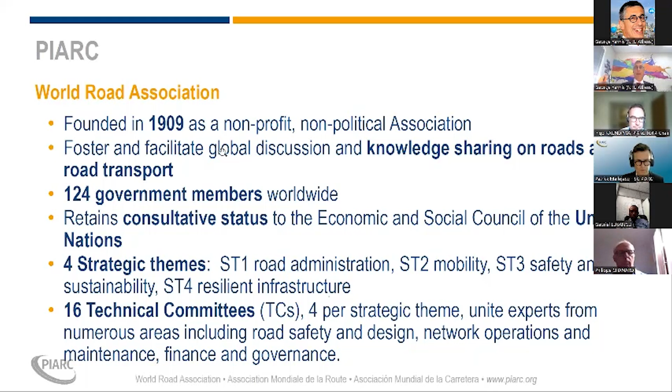In fact, we know everybody, PIARC is very active in all areas of road development and operation, but most importantly, has a very strong component on road safety.

The Technical Committee 3.1 on road safety, it is a part of ST3 and has a special focus on several issues on road safety.

And that was the basis to start this initiative on putting in value in promoting this great work.

Technical reports, the road safety manual, and several seminars are within the activities of PIARC road safety.

And lately this year, there is this project on promoting road safety and all the knowledge gathered within PIARC technical work and technical committees, with special focus on low and middle income countries. However, the lessons are also quite important for all countries in the world.

There is a special support by National Technical University of Athens and Austrian Institute of Technology to this initiative.

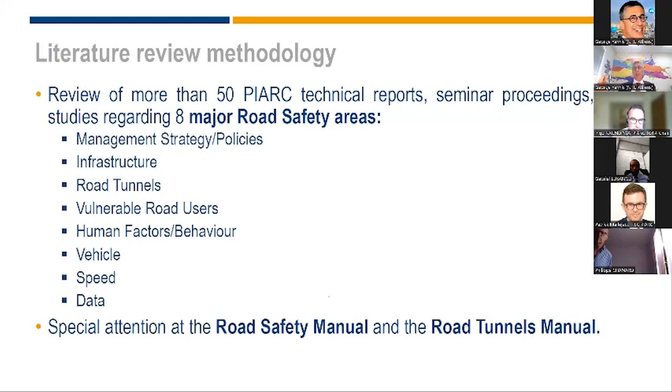We have this 1 year campaign. You have already witnessed some posts and communication campaigns at the newsletter, the frequent newsletters of PIARC.

And today we're going to talk about 4 key areas: road safety infrastructure, road safety tunnels, managing speed, and road safety data, where we highlight all the work of the Road Safety Technical Committee in a comprehensive way and useful for everybody.

So then welcome to my presentation about road tunnel safety. I will start with a brief overview about the safety principles for road tunnels. I will talk a bit about the specific hazards we have in road tunnels. They are a bit different and a bit more serious than what we have on the open road.

A very important topic for tunnels is human factors. And I will also touch some road tunnel safety measures which could be implemented by everyone. Finally, I will give some recommendations and some advice for useful PIARC reports in this area. So let's start with road tunnel safety principles.

For road tunnels, there are special infrastructures. We have high requirements for safety and availability. The consequences of events in a tunnel—if something happens, like a worst case event would be a fire—you have a very significant higher impact with this event than you have on the open road.

Tunnel safety is characterized by complex interaction of different aspects. You can see it here in the graph. Tunnel safety has an interaction with the tunnel user, so people driving through the tunnel must know how to behave correctly. Tunnel operation is also very important—this means the operator, maybe from a control room, and all operational procedures defined before opening a tunnel, which has a big impact on safety. Other big impact comes from the infrastructure: its design, structural design, and also the technical components installed for road tunnel safety.

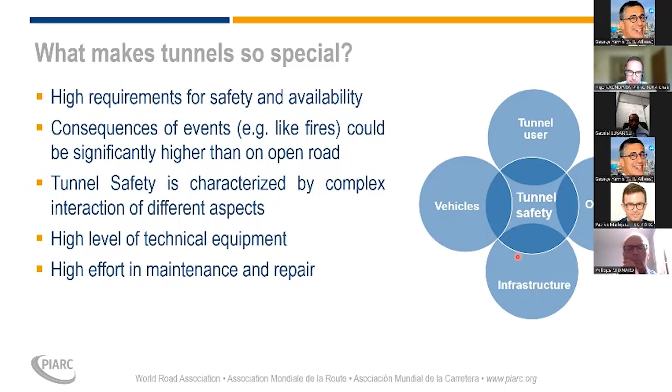So we have developed in PIARC a long time ago a so-called integrated approach to road tunnel safety. This integrated approach starts from the planning of your tunnel system and then goes to defining the safety features which are needed for the tunnel.

So, regarding the infrastructure and regarding operation, these features go into a safety analysis. This safety analysis could be, for example, done by a risk assessment. And if this safety analysis comes to the evaluation part, you have to check if your safety level is acceptable or not.

And if it's acceptable or not is checked against the minimum safety requirements from your legislation. You have so-called safety level criteria and also socio-economic and cost-benefit criteria, which are important here. Then you have the evaluation—you can say the tunnel is afterwards safe and cost effective to operate. Then you can open your tunnel.

The next step would be, are there any changes? You also have to question yourself, if you have an in-service tunnel, are there any changes? Have you done an upgrading, or are there new regulations for your tunnel? Is there a change in the usage of the tunnel, or are there some experiences learned from operation? If yes, the process will start again and you go through this loop. If not, the process comes to an end and you can still operate your tunnel as usual.

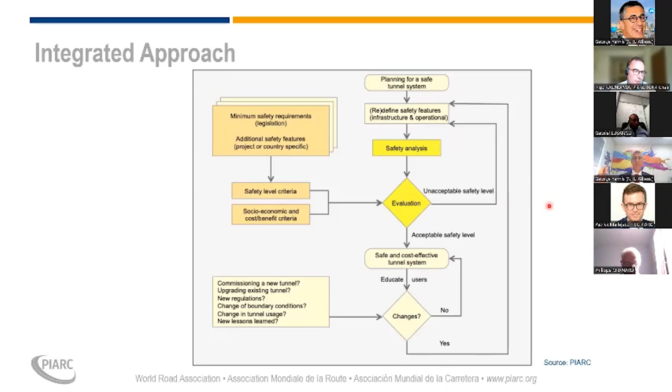So this is the integrated approach, which is very important, and we have a very interesting and detailed PIARC report on that. Safety level criteria I already mentioned. Structure, infrastructure and operational safety measures I will come to later. The socioeconomic and cost-benefit criteria I mentioned before is also a very important aspect of tunnel safety.

The safety assessment techniques, we will go to in the later part of the presentation. The risk assessment procedures we have as a tool for our road tunnels. And the stage of the tunnel life is also important—are we talking about the planning stage, design stage, construction or commissioning stage, or am I in the process of upgrading and refurbishing a tunnel?

A very important aspect is also the operating experience of the staff and the tunnel system condition. Of course, you have to maintain all your technical equipment, but also the structure, so that everything is in good condition. This is also important for tunnel safety.

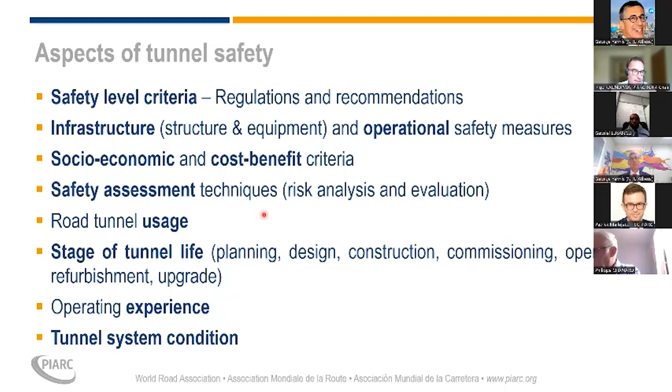So what could be specific hazards in road tunnels? Specific hazards are incidents which require special attention. If you are in a tunnel, you are in a confined space, not on the open road. So if something happens, it's not easy for people to evacuate. The air in the tunnel, the light conditions, everything must be controlled from a technical point of view. It's not like on the open road.

Therefore, we have some hazards which are important to consider in road tunnel design and management: these are collisions, fires, and release of dangerous goods. I will go into detail regarding collisions and fires in the next slides. Collisions are events happening quite frequently in road tunnels. There are some positive factors reducing the probability of a collision in tunnels—a tunnel could be a positive environment preventing collisions. You have very good controlled conditions in the tunnel, so if outside you have heavy rain or heavy snowfall, inside the tunnel everything is dry.

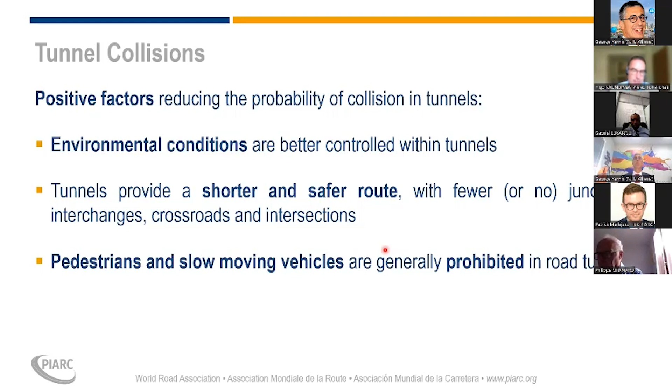You have light conditions, good ventilation if the tunnel is designed well, so good conditions, so less probability of accidents. And you have a short and safe route with few junctions or no junctions, no intersections, so it's a very quiet, very linear way of driving through a tunnel. And you have no pedestrians and slow-moving vehicles normally in a motorway tunnel. So these are the positive effects regarding collisions.

Negative factors increasing the probability of collisions in tunnels could be obstacles, for example the tunnel portal. This is a part of the tunnel which is prone to accidents. You have the tunnel wall, where you can collide with your vehicle if you're getting out of the lane, and this may also influence the driving behavior.

Mostly we have a very narrow or very small road width in the tunnel. So due to the high cost of a tunnel structure, you often have no emergency lane like you have on the open road. You have this change in light conditions, so you have to have a very good lighting system to avoid the black hole effect. Monotonous atmosphere is only relevant for very long tunnels, let's say longer than 1 or 2 kilometers.

Tunnel conditions may cause a misjudgment of horizontal and vertical alignment, so sometimes it's not so easy to see where the road is going, what is the gradient in the tunnel. But we normally have a lot of installations now in the tunnels, a lot of light, so it's getting better, I think, to see the road alignment.

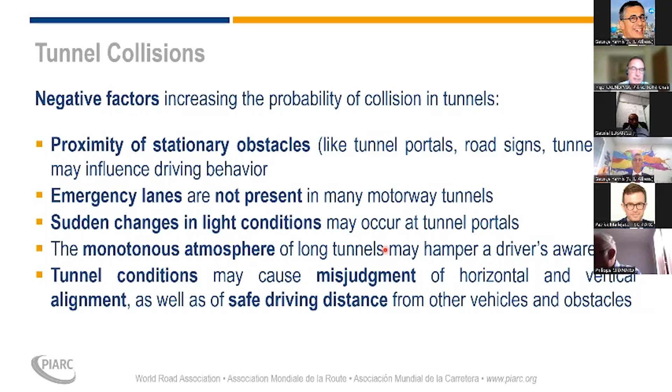And you have to be very quick to safely evacuate in case of a tunnel fire. These are fire curves, of course, for a worst case scenario. I will come to the different fire types later.

So the factors influencing a tunnel fire will be the fire load - is it a heavy goods vehicle, maybe loaded with wood? Technical conditions of the vehicles. Airflow is very important, so the ventilation conditions in the tunnel are very important for the influence of a tunnel fire. And of course the design of the tunnel regarding fire - is all the structural material fireproof, is the right operational equipment in the tunnel to deal with the fire.

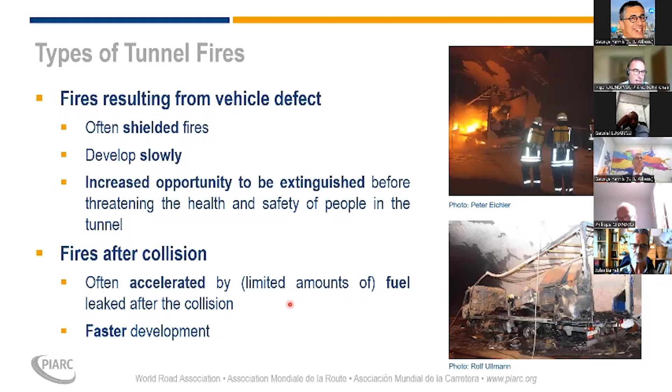I will now come to the human factors. This is a very special and very important part for road tunnels to consider. Design of tunnels and the operation should take into account human factors - this is very, very important. Some people have a feeling of anxiety if they drive through a road tunnel because of the confined space, it's maybe a bit dark, and therefore it's very important to inform users.

So users must be informed how to behave correctly in a road tunnel. This is very important to have the user understand all the operational and safety equipment which is in a tunnel. This is very important to have safety campaigns in your country.

There are also some measures which should be taken. So tunnel safety facilities must be good, recognizable. So you need good lighting that everyone driving through a tunnel at 80 kilometers per hour or faster will see where the safety facilities are. Alarm signals should be provided by multiple-redundant sources, so maybe you have a public address system in your tunnel and you have variable message signs or other equipment.

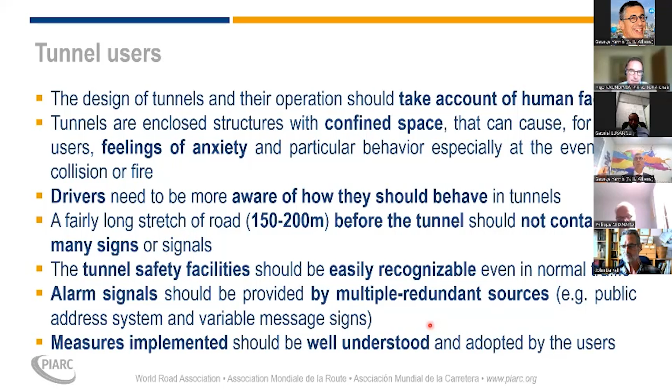It's very important to have different ways of approaching a user in the tunnel to communicate with them. If he has to evacuate, it must be very clear to him. So it's very important to have good communication with the user. Human factors are also important for the operators.

The operating staff is responsible for monitoring and controlling the tunnels. They are normally controlling a lot of tunnels. We have centralized operating centers working 24/7, with one operator supervising 20, 30 or more tunnels.

It's important that they know all the procedures, that they are very well trained, that they know how to inform and warn users in real time, and that they have good coordination with all the other rescue teams or first responders, which are needed if something happens in the tunnel.

This issue becomes very tricky if you have a cross-border tunnel. Then you have to also think about joint trainings with the other country, and have special procedures so that it's clear who has the responsibility for what part of the tunnel.

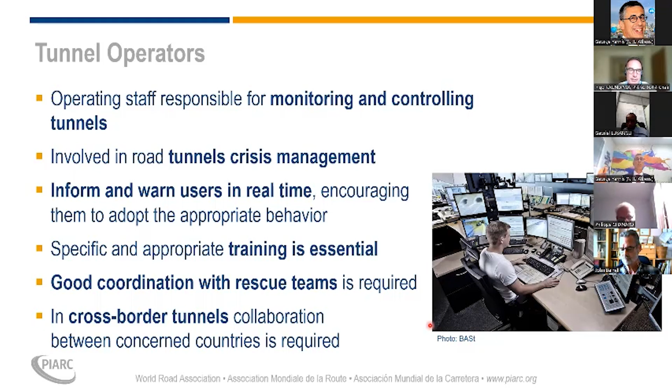Real-time communication - as I mentioned before, the communication with the user is very important. There are a lot of systems built into the tunnel for real-time communications. You also have mobile connections in many tunnels, the public address system I mentioned, and for people without a cell phone, we still have emergency call cabins which could be used.

We have these cabins every 100, 200, 300 meters, depending on the country, and there is a lot of real-time communication equipment already existing in the tunnels.

We have some new things like in-vehicle systems, which will become more important in the future. I think the communication from the tunnel to the car could be done with the new technologies we have in the very newest cars. So there are a lot of possibilities to communicate with users, which should be used to increase tunnel safety.

Tunnel operators and emergency services - human factors are important for them too. They have to consult and cooperate during the tunnel design process. They have to have very good operational measures in place, contingency plans, and to prepare for all possible hazards and events which could happen in a road tunnel.

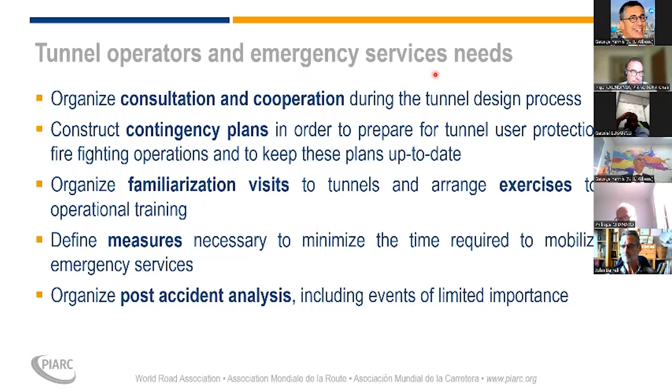So what could be tunnel safety measures? We have measures preventing the occurrence of significant incidents. An important measure is the lighting of the tunnels, to reduce the black hole effect, lane guidance aids, LED lights. The ventilation system I mentioned is very important in the case of a fire - we need a very good ventilation system to prevent a fire or to mitigate its effects.

As on the open road, you have overhead signal systems and a lot of variable message signs, and speed limits must be included in the tunnel, along with speed control. In some tunnels, you have speed cameras to ensure users are using the right speed in the tunnel.

This is very important, and preventive maintenance is important. So if something is happening in your tunnel, it's always good that you have a good maintenance plan, so that in the case of an accident or a fire, everything is working in your tunnel. You have to include good maintenance procedures.

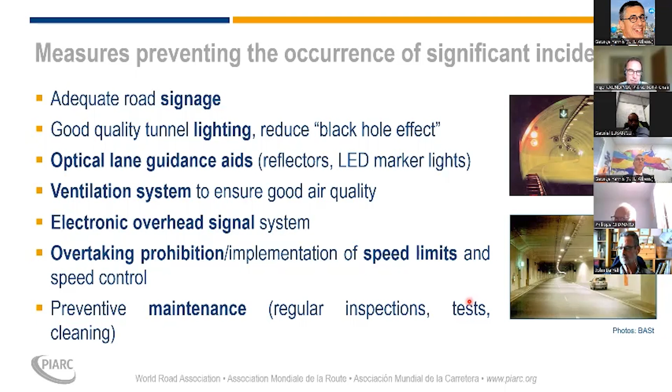Mitigation measures - if something happens in your tunnel, you can have different parts of mitigation measures. You can soften the mechanical impact of a collision, for example, by using safety barriers, very important at the portal of a tunnel.

Avoiding secondary collisions is also something very important. So if something happens in the tunnel, directly close one lane or the whole tunnel tube to avoid secondary collisions and to prevent it from becoming a big scenario which could be very, very dangerous.

Supervision by the control center, as I mentioned before, is very important. Ventilation to control the fire is a very important safety system which helps to mitigate the effect of a fire.

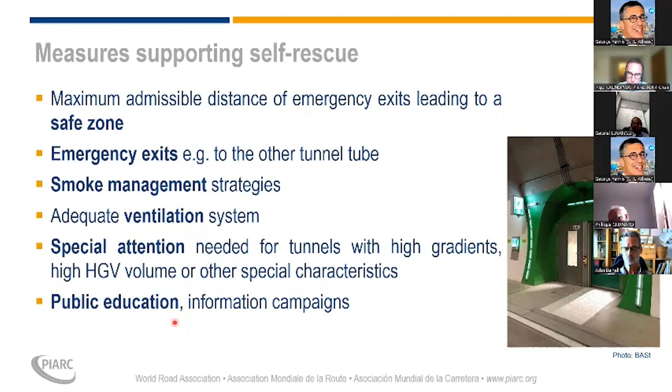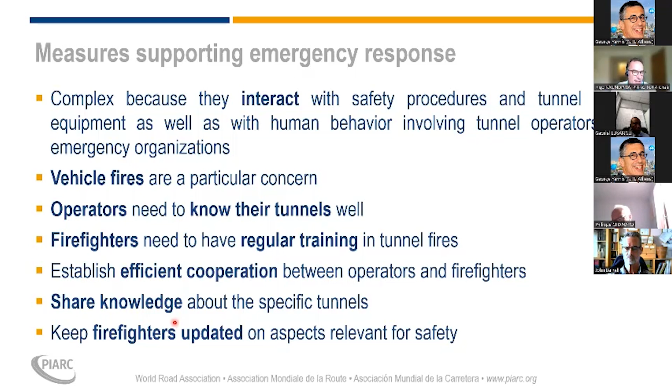Measures supporting emergency response are also important. I will not go into detail here because time is running quickly. The operators need to know their tunnels. This is important. Firefighters have to have regular training and good cooperation with the local tunnel operator.

So, your legal criteria in your country - if the risk is acceptable, this process will stop. If not, you have to implement safety measures and the process starts again. This is very briefly the basic process of risk assessment.

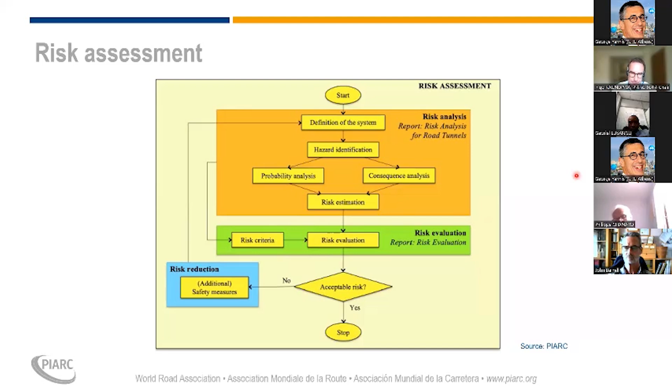We also have a procedure for upgrading or improving the safety of existing tunnels, also published in a PIARC report. This procedure is very similar to the risk assessment, showing how you can assess the safety level of your existing infrastructure. If the safety level is not acceptable, you start implementing additional tunnel safety measures, and then continue the process again, hopefully leading to a safe road tunnel.

So finally, recommendations. What could we learn from all these different aspects I mentioned in my presentation? The integrated approach has proved to be a very good approach.

This should be applied by you during the design of road tunnels, but also later in the operational phase. It's very important to take into account human factors, not only for the users, but also for operators, firefighters, and so on. A safety concept is very important at an early design stage, and it should be provided and adapted during the lifetime of the infrastructure.

Good cooperation between the operator and the firefighting organizations is also key. Measures for prevention, mitigation, self-rescue, and emergency response - I've shown you some examples in the presentation. These must be adapted for the tunnel.

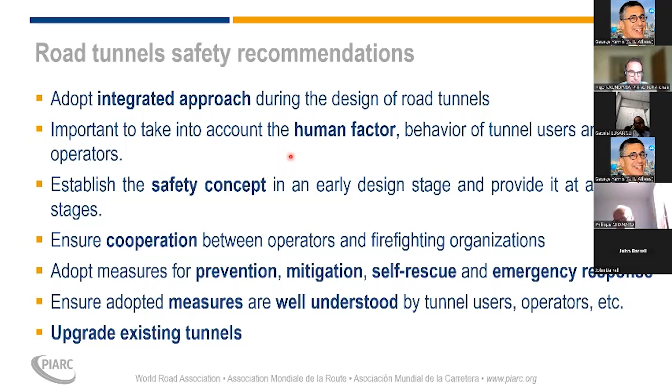These are some PIARC reports which are relevant, which I've copied into this last slide of my presentation. You can click here and you will have the reports directly in your web browser.

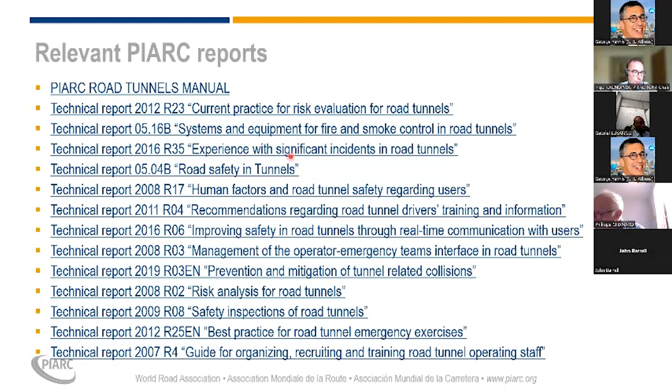Finally, I would like to remind you of the upcoming World Road Congress in Prague. We will have a technical session on road tunnel operation and safety on Thursday morning. In this session, we will have a presentation about the special challenges of road tunnel safety for low and middle income countries, presented by our colleagues from South Africa and India. I think this will be a very important and interesting session and presentation at the World Road Congress.

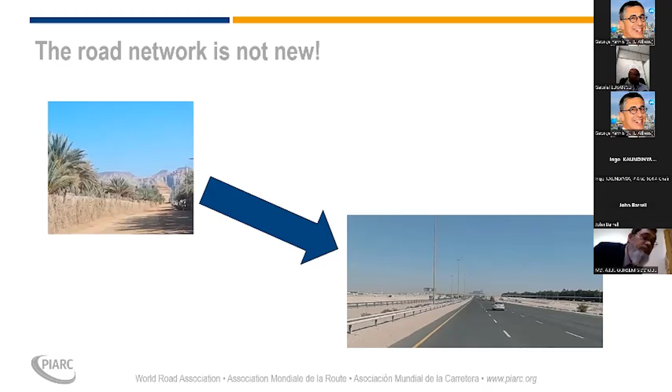We need to consider all road users, and when they're using what is a variable road network, they need clear indications of what to expect, when to anticipate changes, and how to take appropriate action. So they need consistency: consistency of signing, consistency of road layout, consistency of expectation on what to do, and sufficient visibility to recognize those changes, recognize those hazards, and be able to take appropriate action.

They also need to understand what those features are. They need to be legible. They need to read the road environment, to be aware of who is around, what their actions might be, and how they can react appropriately. It is all about the road user being able to react appropriately and in sufficient time to deal with the conditions ahead.

It needs to be done comprehensively, needs to be done consistently. But importantly, the road user needs to understand what is an appropriate speed for particular circumstances in order to negotiate the road network safely. If it is not credible, if they don't believe there should be a limited speed along a particular stretch of road, they won't do it. And the one time they really need it is when they come to make mistakes.

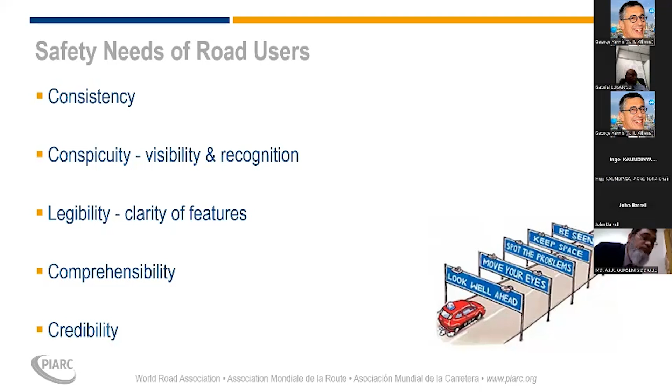Traditionally, we have dealt with incidents as they happen and looked to correct specific problems. More recently, we have recognized that it is not necessarily the individual that is at fault. It is a systematic failure of the network as a whole. So dealing with a safe system rather than individuals is vitally important.

And the safe system basically says human beings are fallible. We can make mistakes. So when we make mistakes, the system needs to be forgiving. We need to be able to make those errors and corrections without it having fatal consequences. So when there is a crash or a collision, the resultant forces need to be survivable. And the most vulnerable element in that system is the human being.

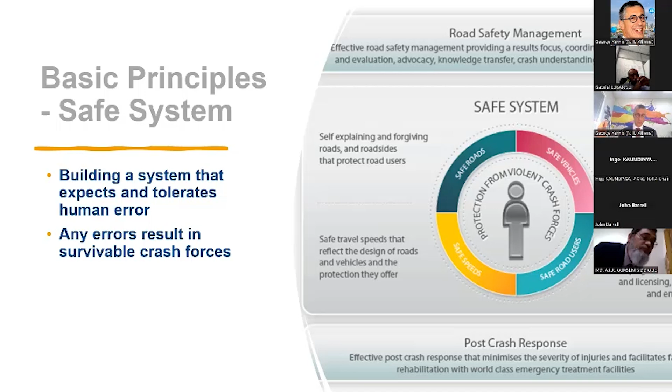Human beings cannot withstand severe stresses and severe changes safely. It needs to be done gradually. Those forces need to be reduced to a survivable level. And the classic chart is where pedestrians are involved: as soon as collision speeds exceed 30 kilometers an hour, there is a very rapid change in survivability.

So at speeds in excess of 40 or 50 kilometers an hour, unprotected pedestrians or cyclists are more likely to be killed. The vehicle itself provides a degree of impact protection, but that is only valid at certain speeds, and the areas of protection around vehicles varies. Side impact collisions are survivable around about 60 kilometers an hour. Head-on collisions, anything above 70 or 80 kilometers an hour, leads to fatal injuries.

So we need to shape and control our streets and roads so that they are safe for all road users, bearing those types of collisions in mind, taking those into account. And there's essentially six basic types of collision.

The main one, particularly on a link or in a rural area, is loss of control. On a dead straight road, in perfect conditions, you would anticipate that drivers don't have a problem. Increasingly they do, whether it is tiredness, monotony, or vehicle failure, and they will lose control in the lane and potentially collide with the vehicle coming the other way, or if there are pedestrians and cyclists by the side of the road, they can injure them. They will also collide with roadside hazards.

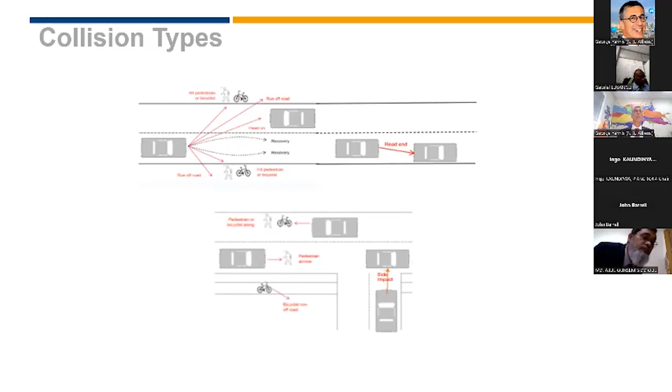Equally, if visibility is poor, there's a risk of rear end collisions, and drivers need to be able to adapt to those situations at an appropriate speed. And when you deal with intersections, clearly a side impact collision with a vehicle or with other road users crossing the side road is equally likely. You can also interact with slow moving vehicles, pedestrians and cyclists within the carriageway itself. Whatever is an appropriate speed needs to consider these different types of collisions and the likelihood with which they can occur.

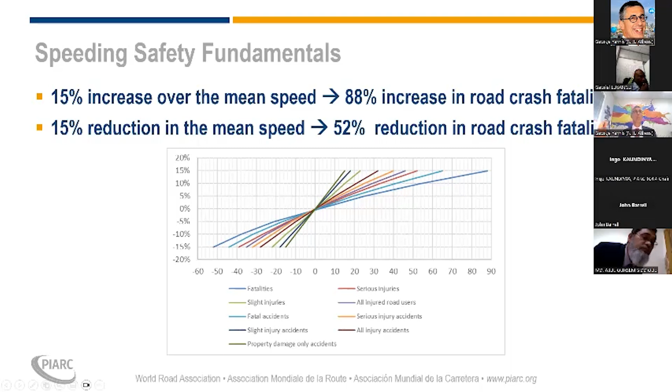Trouble is, speed and collision severity are not linear. A 15% increase in mean speed can lead to an 88% increase in road crash fatalities. Similarly, a reduction in speed can give a 50% reduction in crash fatalities, which is fine bearing in mind mean speed. But individual vehicles will travel at different speeds, and there will be variability around the mean speed or the 85th percentile speed at which drivers choose to travel, because that is where they individually feel safe.

Roads with low complexity—wide, straight, open roads with no intersections and very few vulnerable or slow moving vehicles—are designed for drivers to reach higher speeds. The risk of crash occurrence is mainly related to the difference between the speed designed as safe and the speed actually held by drivers, thinking this is what I feel comfortable with, this is what I can deal safely with.

The overall aim with the road network is to create a road where the varying speed parameters are all in balance. When we design a new road, we tend to deal with design speed—the speed at which we want drivers of vehicles to travel.

The wider and straighter the road, the more lanes it has, the greater the forward visibility, restrictions on intersections, and low presence of pedestrians, cyclists, non-motorized users, then we go for very high design speeds, typically 120, 140 kilometers an hour. That would like to be within the safe speed limit, assuming head-on collisions have been removed and the posted speed limit is in place to guide drivers at what is an appropriate and safe speed.

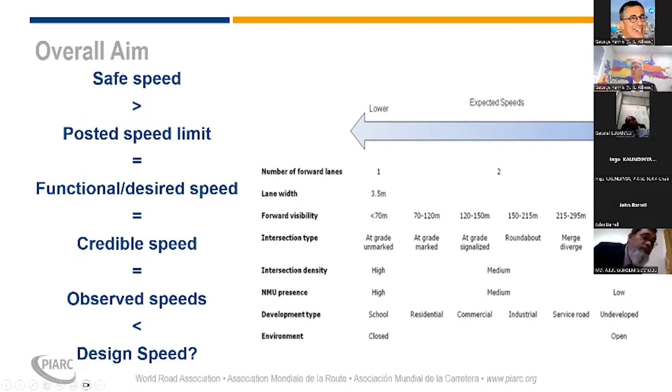Because we need to limit the standard set of speed limits that are consistently applied. We can apply any number of speed limits we choose, but the more speed limits you apply, the more frequently you change them, the more likely people are to not recognize the need for them.

There needs to be an overall body or lawmaking process that sets speed limits according to safe, survivable standards—posted speed limits that are in line with the function of the road. They're safe, self-explaining and intuitive, and importantly, clearly and consistently signed. The signing of speed limits is crucial to determining appropriate road user behaviour.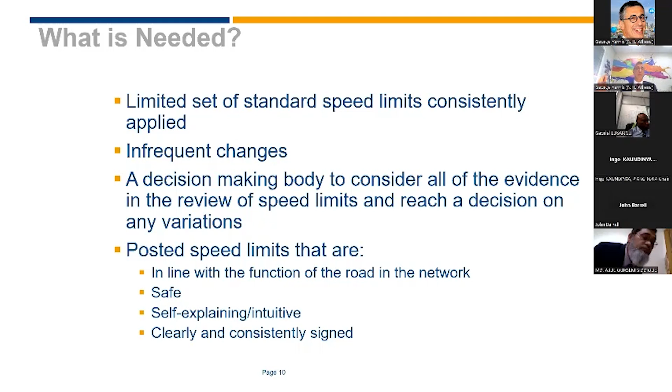So what is the safe speed? Essentially, safe speeds vary depending on conditions. If it's wet, if it's dark, if it's raining, then the safe speed will vary.

For general road conditions where pedestrians are prevalent and there is the possibility of a mix between pedestrians and vehicles—where you don't have well segregated footways and you're asking pedestrians to use part of the travel lanes or carriageway to get around—then you're looking at safe speeds of around 30 kilometers an hour.

This is typically around schools and in some intense urban areas where you have a large number of intersections where side impacts are possible—uncontrolled or priority crossroads and T-junctions, potentially roundabouts. Signalised intersections tend to remove side impact collisions because you're negotiating the same space at different periods of time.

But all those uncontrolled or semi-regulated intersections need to be controlled within a safe speed of 50 kilometers an hour. Single carriageways outside of those situations can operate safely up to 70 kilometers an hour.

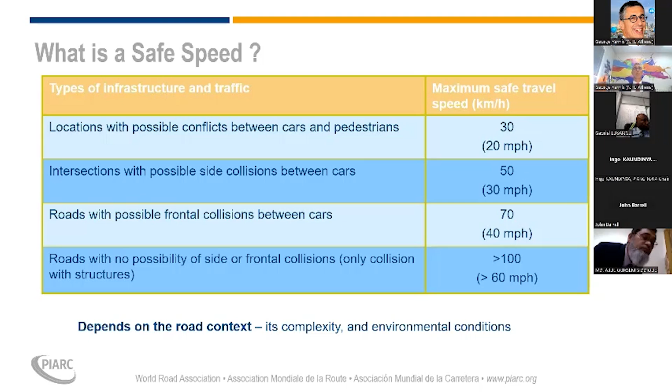In many low middle income countries, herded animals along large rural corridors present a major and uncontrolled hazard where vehicle speeds need to be reduced where they're in large numbers.

Importantly, when considering the road, you need to look at its context. We tend to think of roads as just fulfilling a movement function, getting from A to B as readily and safely as possible. But inevitably, roads pass through a number of different landscapes, whether it's urban, semi-urban, or rural.

And the function of the road, from a purely movement one to an access and sense of place where a lot of other activities take place, is very fluid. There is no clear distinction between the mobility and land use activities of particularly arterials, collectors, and locals.

Local roads may front directly onto arterials, and the control of that road hierarchy and how we manage speed between them has a fundamental impact on the credibility of safe speeds and the adaptability of the road network to those speeds. So to get safe speed compliance, we need an operating speed that is clearly designed to be at or ideally below what is the safe speed.

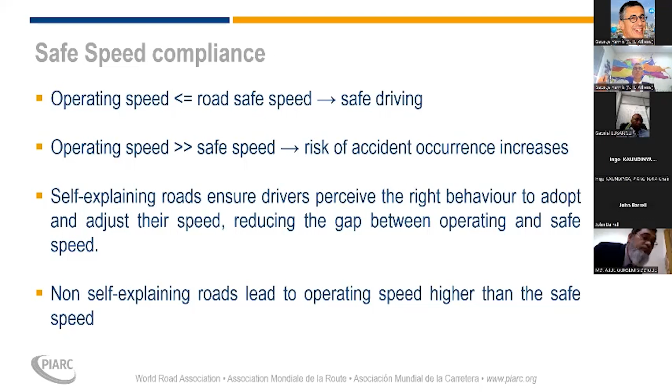Where roads are not self-explaining and drivers perceive them to be safer at a higher speed than they really are, that is what gives rise to high numbers of fatalities and serious injury risks.

The key to this is posting appropriate speed limits. Speed limits that give a clear indication of the safe and operational speed need to be clearly signposted to identify the limits to which that speed applies.

In many low and middle income countries, you have a speed limit sign at the start of a speed limit change, but very rarely is there one at the end that then potentially denotes a safer speed beyond that. There is an assumption that whatever hazard had been there to generate the lower speed has now been passed, but there is no clear indication of the limitation of a particular speed limit.

They need to be in the right place to reflect the road characteristics and not overused. Frequent changes in speed limit tend to a lack of believability, a lack of credibility on the part of the road user. And they need to be homogeneous over the road network, identifying the same sorts of characteristics.

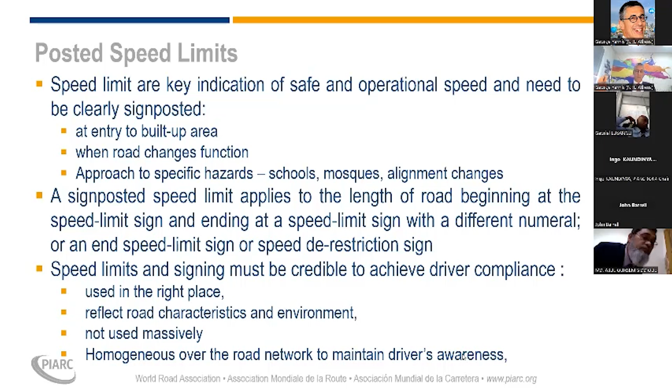A few examples. These happen to be Middle Eastern ones, but they apply virtually across the globe. If we look at a freeway, where you're looking at a functional or desired speed of 120, maybe 140 kilometers an hour, with multiple lanes, wide paved shoulders, large recovery areas, and a protected median in the middle that prevents crossover accidents.

That will have a corresponding maximum safe speed and safe speed limit. Actual safe measured speeds are round about slightly below the 120 kilometer an hour functional speed limit. The design speed is probably somewhere around 140 kilometers an hour. So in that instance, the safe speed is both credible and adopted, and no additional measures are needed in order to get a safe, compliant speed on that length of road.

If we then look at an urban divided carriageway, where the design speed is around 100 kilometers an hour, it is divided, has multiple lanes, has a footway down the side rather than a paved shoulder, but equally has a protected median. The functional speed is about 80.

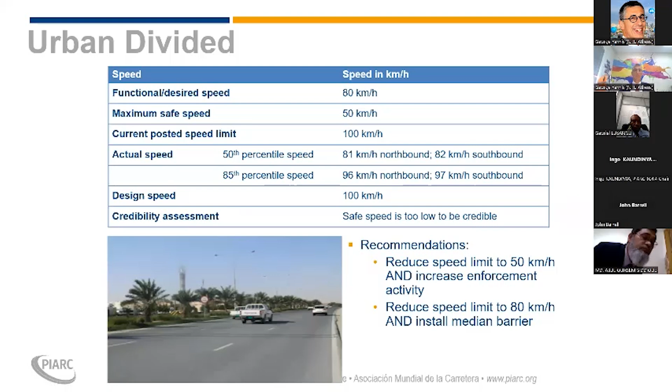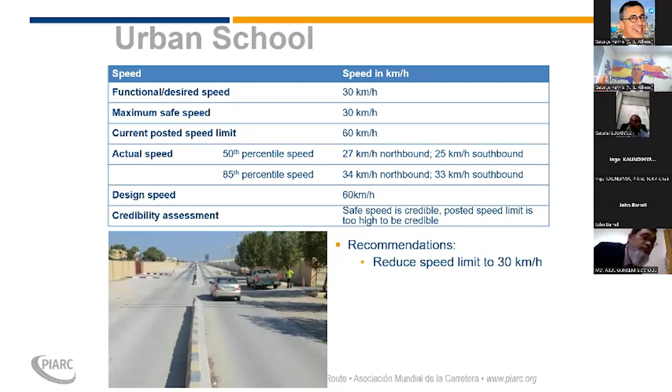To be self-enforcing, simply reduce the speed limit to 30 kilometers an hour to provide additional reinforcement for those few who exceed the safe speed, and you create a safe and credible road environment.

So freeways generally meet safe speed assessment because they are wide, they are open, they are designed for high speeds, no pedestrian activity, and tend to be grade separated intersections.

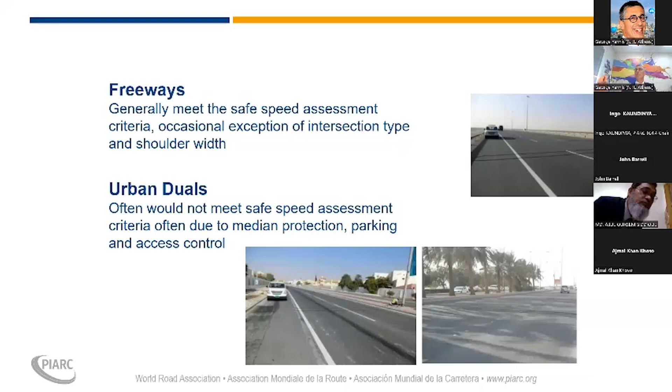It is the urban dual carriageways that have a much more complex land use function either side, need for more crossings and more interaction with non-motorized users that require a greater design effort to match the safe speed and the credible speed. In the Middle East, many of these are urban dual carriageways which tend to foster higher speeds than is safe in these particular circumstances.

Rural undivided carriageways tend not to conform to safe speed criteria because they're long and straight with very little land use impact. They have potentially wide recovery areas, but the risk of head-on collisions is prevalent. Single vehicle loss of control, making sure there is adequate recovery areas, and matching the posted speed limit to the environment is very difficult to achieve.

When everything else fails, it is a case of convincing drivers that they need to travel slower by putting traffic calming measures in place.

Critically, when the environment changes, install gateways, carriageway narrowings, or horizontal and vertical deflections to provide positive encouragement to slow down.

Roundabouts, whilst being an at-grade intersection that does provide conflicts, reduce the side impact by having collisions that occur at an angle rather than at 90 degrees, and vehicle speeds tend to be slower around roundabouts due to the horizontal curvature.

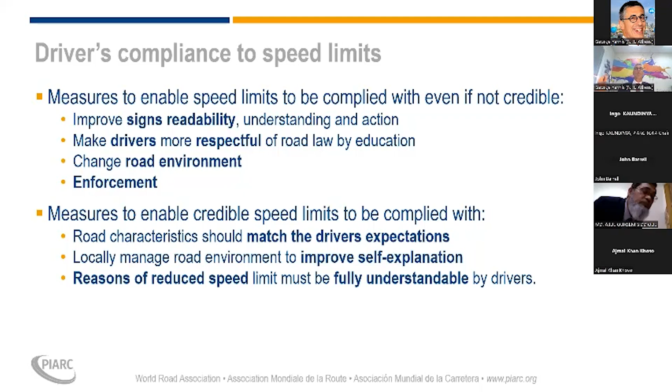For credible speed limits, road characteristics need to match the driver's expectations, and locally manage the road environment to improve that self-explanation. The reasons why the speed limit is in place need to be fully understood by drivers. If they don't know why and don't see a reason, and use the road regularly, they will repeatedly ignore what they see as the recommended speed.

So speed management is not only about regulating speed, but also planning and designing appropriate road layouts to ensure safe travel speeds. Main countermeasures used are improving readability, road and road environment improvement, and as a last resort, enforcement.

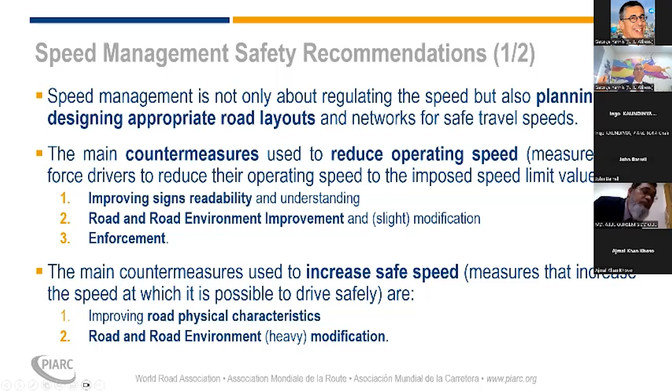Main countermeasures used to increase safe speed are the physical characteristics and heavy modification of the road environment. Managing speed through behavioural change or speed compliance regulations could be done by enforcement, education, or financial penalties. It tends to be the financial penalties that are the main reason why drivers dislike enforcement so much.

Treating high-risk locations with traffic calming and speed reduction measures where there is a known problem. Often where there is a problem in one location, one that is very similar appears to have no problem, and we need to fully understand why the same layout has particular problems in one location rather than another.

Increasing technology will help and could well replace a lot of the physical efforts we put in place, but that will take time. The current vehicle fleet has an average age of 10 years. In low and middle income countries, that can stretch to 20 years. If full speed control of vehicles doesn't come in for another 10 years, then we're looking at a 30-40 year time horizon before these sorts of technologies come into low and middle income countries.

It is a changing road environment and we need to adapt to it, but we need to be clear on understanding why road users choose the speed they do. If we understand road user behaviour, we can manage it far better and more realistically. Any questions? Thank you very much.

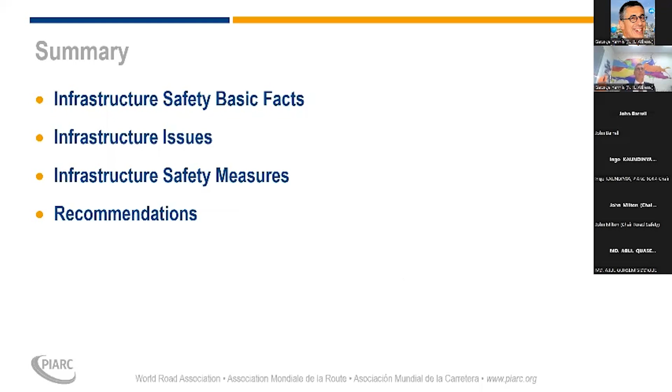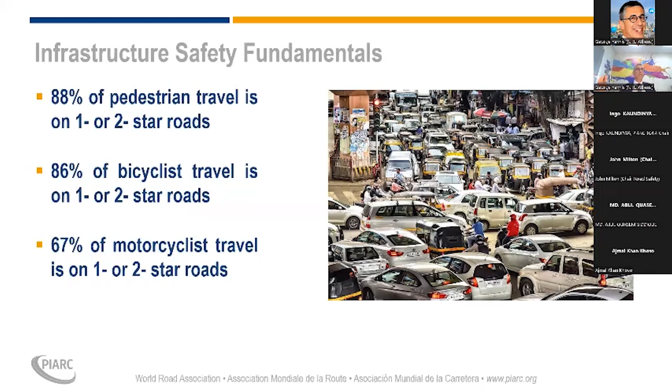So first, about infrastructure safety fundamentals. When we look at the 1-star and 2-star roads, 88% of pedestrian travel is on 1 or 2-star roads. 86% of bicyclist travel is on 1 or 2-star roads. And 67% of motorcyclist travel is on 1 or 2-star roads. And when we think about that, that is a lot of challenge for those who are walking, biking, and riding in these less than safe environments.

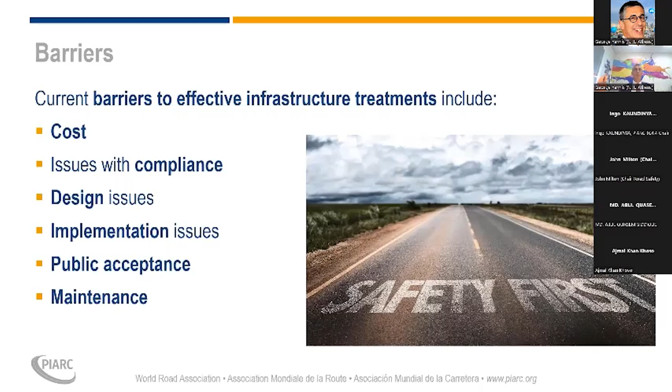When we look at monitoring some of the issues that we see with design, implementation, and maintenance issues, we find that monitoring, analysis, and evaluation, a very important component of safety management of the network, is typically omitted. Although it's required to understand whether or not you're meeting the outcomes and make changes if necessary, it's not always done. The assessment of safety performance impacts and the impacts of change is often overlooked. What might work over at that location won't work at the location I have. And there's different reasons for it. That evaluation allows us to understand what those differences are and then make adjustments as necessary. And in most countries and cities, more than half of all road deaths and severe injuries happen on less than 10% of the road length.

When we talk about compliance issue, we see lower levels of compliance with the road rules and a lesser respect for the rule of law in many low and middle income countries than we do for high income countries. This might be for issues of enforcement and also the necessity from walking from place to place may make us respect those laws a little bit less. Compliance of treatments by road user is usually a significant issue in low and middle income countries, and it is very likely that the treatment effectiveness will be lower as a result.

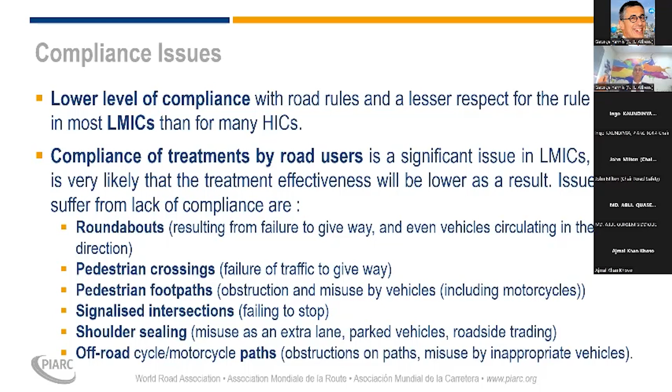When we talk about safety issues, road infrastructure is often the single most significant factor that contributes to the severity outcome of a crash. Single most important.

Head-on crashes occur on undivided roads, while lack of footpath or safe crossing presents a major risk for death and injury for pedestrians. This is often what we see in many locations, both in high and low and middle income countries - this lack of pedestrian facilities. For cyclists and motorcyclists, the lack of specific infrastructure features that ensure a safe journey, like cycle lanes and motorcycle lanes, leaves them vulnerable to impact.

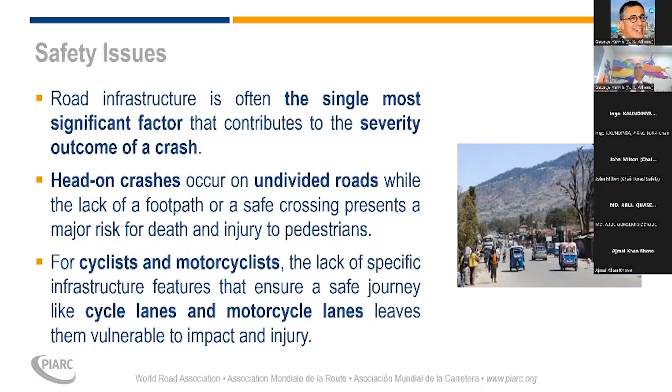Let's talk a little bit about infrastructure safety measures. The UN Decade of Action really told us about what to do, how to do it, and who to do it, focusing on safe road infrastructure, safe road use, post-crash care response, safe vehicles, and multimodal transport and land use planning as to what to do.

How to do it was legal frameworks, gender, technology, speed management, capacity development, to be focused on low and middle income countries, and providing the financing necessary to provide the safe road infrastructure. Who to do it was government, civil society, funders, UN agencies, and the private sector.

The safe system approach was focused as the UN's second decade of action for road safety with a goal of reducing traffic deaths and injuries by 50% from 2021 to 2030.

Adoption of the safe system approach is necessary to prevent fatal and serious crashes. Focus upon improvements in infrastructure and vehicle safety over the medium to long term while essential in providing a forgiving system. And as John also talked about self-enforcing roads, that provides for that forgiving system.

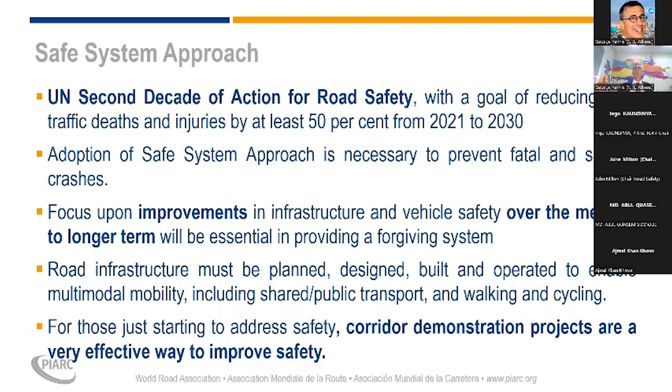Road infrastructure must be planned, designed, built, and operated to enable multimodal mobility, including shared and public transport and walking and cycling. For those of us just starting to address safety, corridor demonstration projects are a very effective way to improve safety, to improve public understanding, and to improve funding for those types of projects.

Death and serious injuries is unacceptable. Humans make mistakes and we need to account for those mistakes in the way we design and operate our roads. Humans are vulnerable and they're subject to injury.

Responsibility is shared. We're all in this together, and safety is proactive. We shouldn't wait for a series of fatal and serious crashes to occur before we do something. By building a redundant system, we're able to carry forward issues that we might see where other locations or other parts of the safe system fail.

Safer road means avoiding crashes by separating users in space. By doing so, you're reducing the conflicts as you are when you separate users in time. Increasing attentiveness and awareness allows people to understand what is on the road and react to it in sufficient time.

It's also about managing kinetic energy by managing speed. Understanding how to do so and setting credible speed limits, as was just talked about, is very, very important to managing kinetic energy. We need to manage mass difference, for instance separating people walking and biking from those in vehicles and lorries. Managing crash angles is critical to reducing kinetic energy.

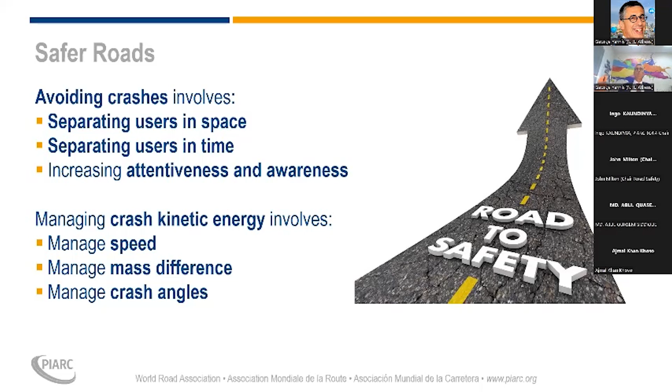With infrastructure safety management, clear and defined policies relating to the delivery of these safe system infrastructures are required to drive road safety improvements. It's important to understand what you're doing, where you're doing it, and why you're doing it.

Standards, guidelines, and tools provide this, and they are a mechanism to translate policy into action. Care should be taken when borrowing policies from other countries to ensure that it fits local conditions.

The priority for low and middle income countries should be a shift from human-ways to assisted-ways across as many roads as possible, starting with the main highways and corridors. This action would imply that road infrastructure improvements related to lane markings, pavements, surface irregularities, and visibility of vertical signs lead to safer roads for both human-driven and automated vehicles.

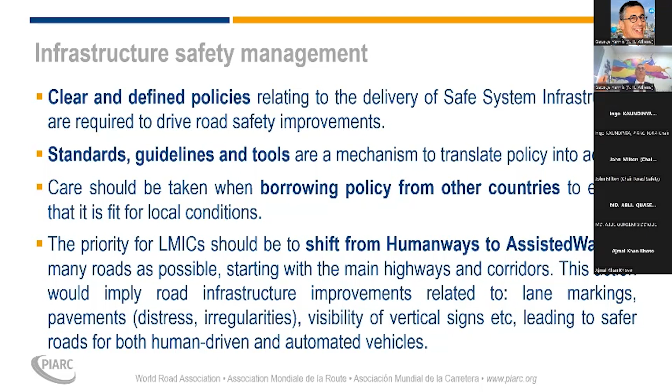Assessment of risk should be undertaken for the entire network. It's necessary to understand what is out there and what to do about it.

Although there are established approaches for identifying high-risk locations, training of key staff is required. For existing road networks where data is available, assessment of crash data should be undertaken to identify high-risk locations.

But it's important to recognize that crash data is not always available, so there needs to be another mechanism to be able to proactively assess risk. Proactive approaches should be adopted for impact assessments, road safety audits, safety inspections, and road safety assessment programs.

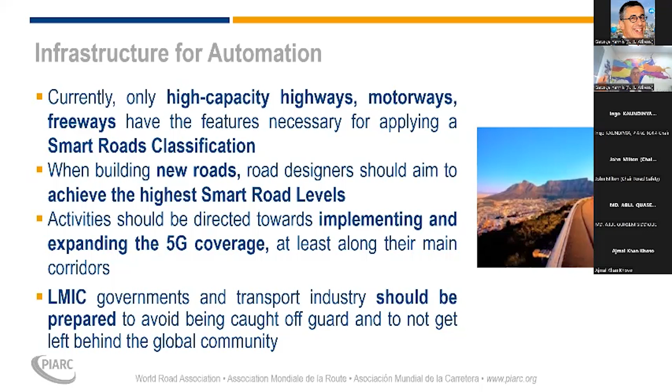Infrastructure for automation, and each country will see automation at different rates. Currently, only high-capacity highways, motorways, and freeways have the features necessary for applying smart road classification. When building new roads, road designers should aim to achieve the highest smart level roads. Activities should be directed towards implementing and expanding 5G coverage, or at least along main corridors. Low and middle income countries and the transport industry should be prepared to avoid being caught off guard and left behind the global community.

Now some recommendations. Develop functional classification and desired safety performance standards for each road user group at the geographic land-use level and road corridor level. Review and update legislation and local design standards that consider road function and the needs of all road users and specific zones.

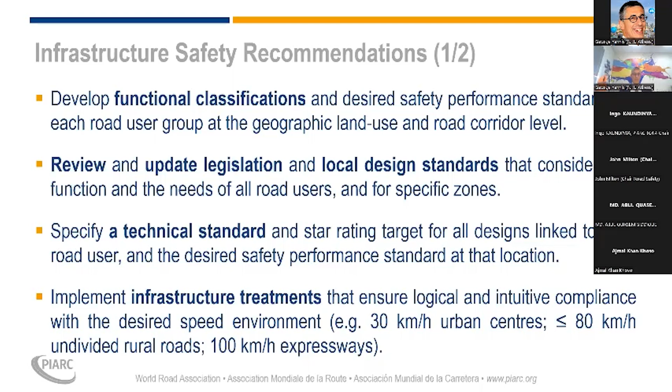Specify a technical standard and star rating target for all designs linked to each road user and the desired safety performance standard at that location. Implement infrastructure treatments that ensure logical and intuitive compliance with the desired road speed environment. For instance, 30 kilometer per hour urban centers, less than 80 kilometer per hour undivided rural roads, and 100 kilometer per hour expressways.

Undertake road safety audits on all sections of new roads, from pre-feasibility through detailed design, and complete assessments using independent and accredited experts to ensure a minimum standard of 3 stars or better for all road users, based on the IRAP star rating method. IRAP provides an affordable solution for road safety audits and inspections and is recommended especially for low and middle income countries.

Undertake crash risk mapping, where data is available and reliable, and proactive safety assessments and inspections on the target network, with a focus on relevant road users' needs as appropriate. Set a performance target for each road user based on inspection results with clear measurable metrics at the attribute level, e.g. providing sidewalks.

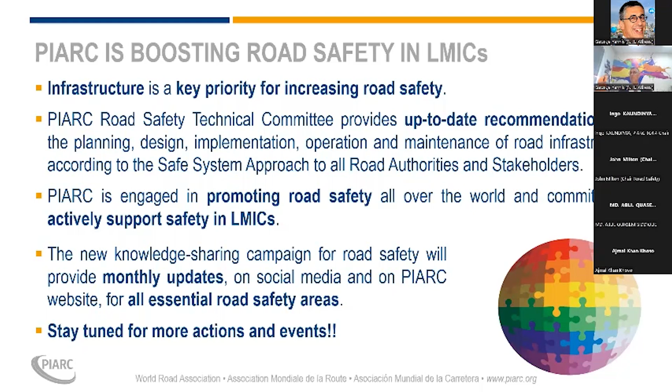Infrastructure is a key priority for increasing road safety. The PIARC Road Safety Technical Committee provides up-to-date recommendations on the planning, design, implementation, operation, and maintenance of road infrastructure according to the Safe System approach, for all road authorities and stakeholders. PIARC is engaged in promoting road safety all over the world and is committed to actively supporting safety in low and middle income countries. The new knowledge sharing campaign for road safety will be providing monthly updates. This is one of them, shared on social media and on the PIARC website for all essential road safety areas. Stay tuned for more actions and events.

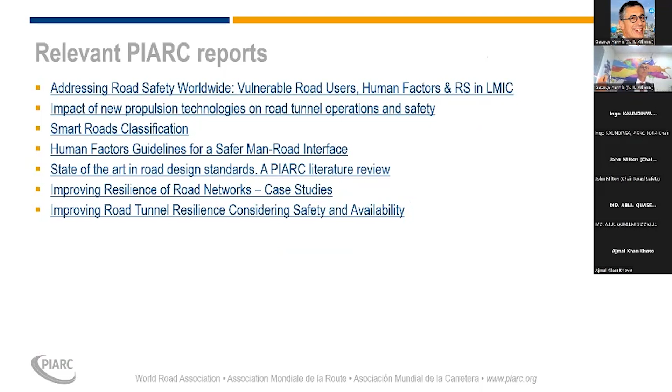And these are just some of the relevant PIARC reports. Quite a few of them, and more being produced every day. And with that, I'm more than happy to take any questions.

Thank you very much for this very comprehensive and concise presentation. We have one question at the chat, whether you could elaborate a little bit better about the forgiving system, forgiving environment, perhaps of this.

An example of forgiving environment would be one which accounts for the safety of the road user, particularly the severity, and would have systems in place that provide for reduced crash energy. For instance, roadside safety hardware might have breakaway signposts that provide for crashes related to motorcyclists as well as vehicles, understanding that when people get in a crash, they're vulnerable to injury, and that we need to do what we can to remove those crash forces from the system.

I have also a small question, whether... what is different when we're having strategies on infrastructure safety improvement between urban and interurban areas? What's the key difference?

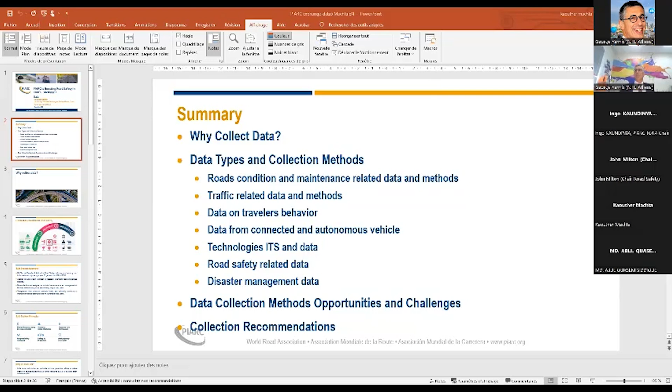So I will speak about data, their importance, how they can be collected for better use in low and middle income countries with limited resources, but also in more developed economies with different needs and priorities.

I will explain why we collect data. I will speak about data types and different collection methods, road conditions and maintenance-related data and methods, traffic-related data, data on travelers' behavior, data from connected and autonomous vehicles, technologies, ITS and data, road safety-related data, and then disaster management data.

After this, I will discuss data collection methods, opportunities, and challenges. And then I will give some recommendations.

Why do we collect data? We do it to keep roads safe and in good condition, and because reliable and accurate road safety data is essential in planning effective safety policy and treatments and monitoring performance.

So why do we collect data? We need it to have accurate information and to make better decisions in a strategy and policy of road safety, and to manage roads also.

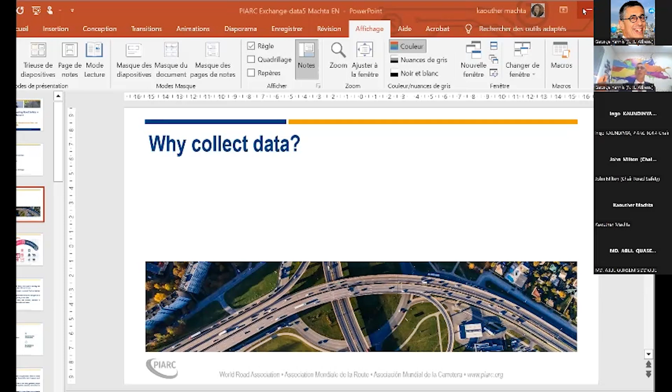The safe system approach has some principles that assume that death is unacceptable. Humans can make mistakes even when we have a very good conception of road design, well constructed. Humans are vulnerable; people cannot survive impacts at speeds exceeding 50 kilometers per hour.

As I said today, data collection can facilitate the maintenance and management of roads. Strengthening data collection methods locally and nationally contributes to improved evidence-based policies on vulnerable road users.

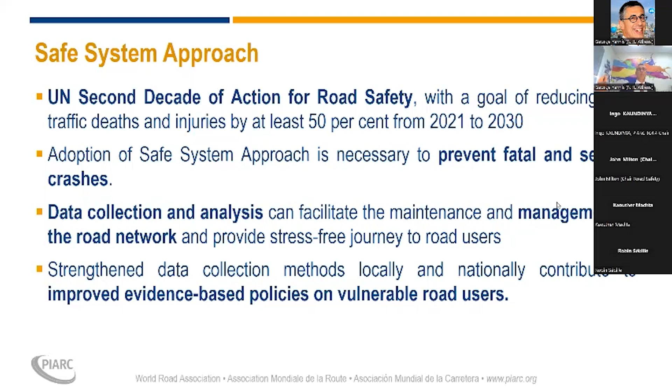Here is to say that death and injuries on the road are unacceptable, and human beings are fragile, and they cannot survive impacts occurring at speeds exceeding 50 kilometers per hour. All the responsibility is shared between all actors of the road, designers and road users. We believe that accidents can be avoided if a proactive approach is taken, and redundancy is crucial.

Why is it important to collect data? We need this data. While some road crashes are predictable and thus preventable, efforts to reduce crashes in developing countries are further hampered by a lack of accurate crash and casualty data.

Low and middle-income countries' road administrations struggle to successfully adopt efficient ways to manage their assets due to limited resources. Indeed, data collection helps governments more effectively prioritize funding, monitor the impact of investments, and strengthen inter-agency collaboration and efficiency.

Improved access to data on the effectiveness and cost involved in establishing interventions can lead to ongoing improvement and support for their broader application.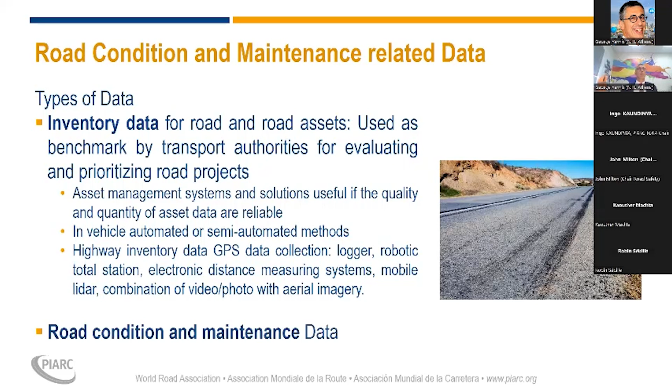It can be done with in-vehicle sensors, essential components of any vehicle, which can improve vehicle performance or monitor its operation and the status of its parts. It can enhance the driving experience. We can also do it with smartphones, using accelerometers capturing variation in movement caused by the road surface.

We can do it with unmanned aerial vehicles or drone systems, a popular data collection method for road condition and maintenance management. This is low cost, readily available, and efficient, and can reach remote locations, therefore safer. It can also be other fixed sensors, recorded signals, acoustic signatures, and for winter maintenance, thermal mapping forecasting models.

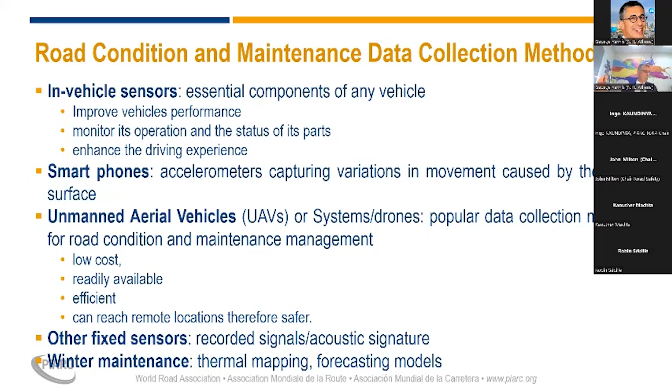It is important to get large-scale data on travelers' behavior. People actively participate in the process of recording data using technologies such as GPS systems, cellular networks, social media services, automated fare collection systems, and smart cards. All these have benefits for modern traffic management and control strategies, robust vehicle detection systems, mining mobility patterns, travel demand analysis, incident detection, air quality measurements, and urban planning and emergency systems.

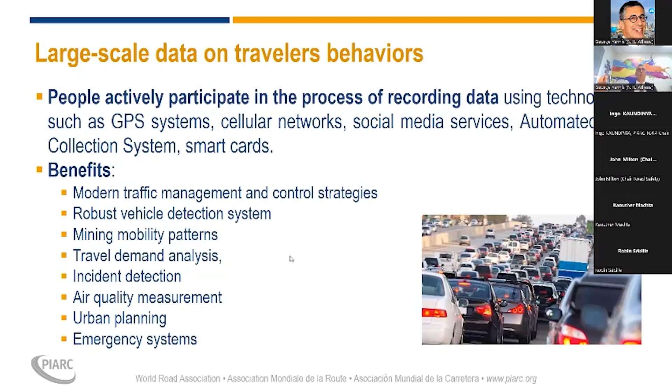We can collect data from connected and autonomous vehicles. In fact, embedded electronics account for more than 30% of the cost of a vehicle, including a multitude of sensors and actuators, various computers, engine control units, and internal digital networks of interconnectivity. These systems provide road condition data, traffic management data, safety data, and can also be used for identification of intersections with high levels of variability in sudden changes in driving behavior prior to the occurrence of crashes.

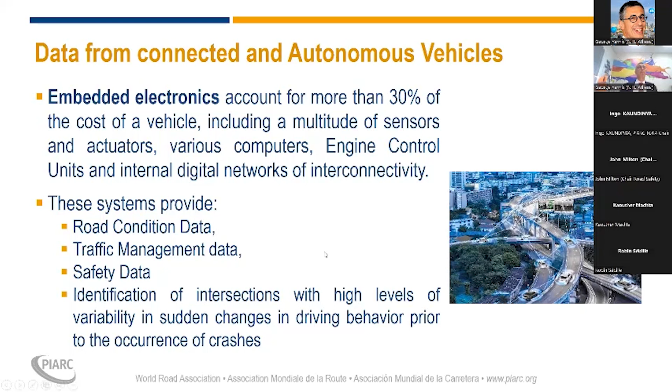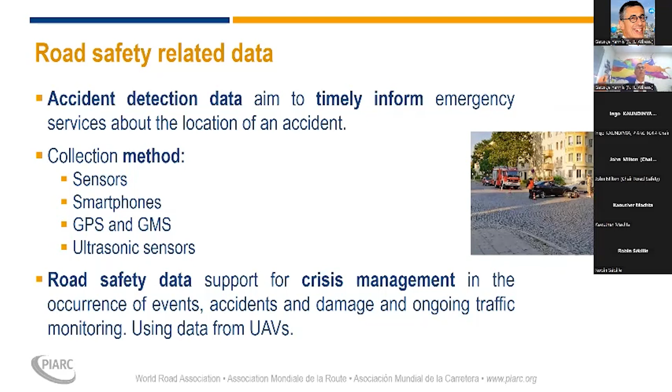For road safety related data, accident detection data aims to timely inform emergency services about the location of an accident. Data can be generated by sensors, smartphones, GPS and GSM, and ultrasonic sensors. Road safety data supports crisis management in the occurrence of events, accident and damage, and ongoing traffic monitoring, using data from unmanned aerial vehicles also.

We can speak also about disaster management data. A greater focus is required on the interaction of disaster management activities with the public to produce better results, instead of prioritizing only making infrastructure safe. To collect data for disaster management and disaster relief, we can use satellite images, meteorology, cameras, vehicle detection, and GIS.

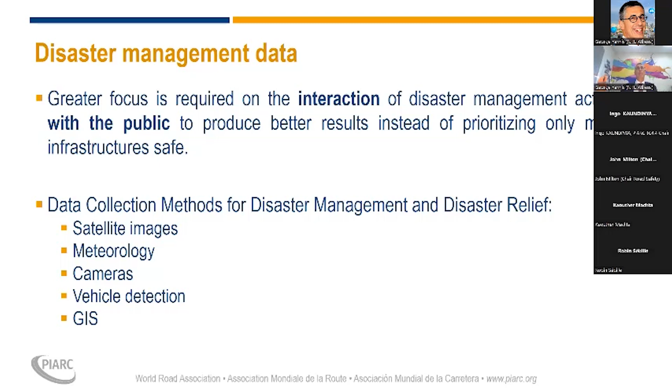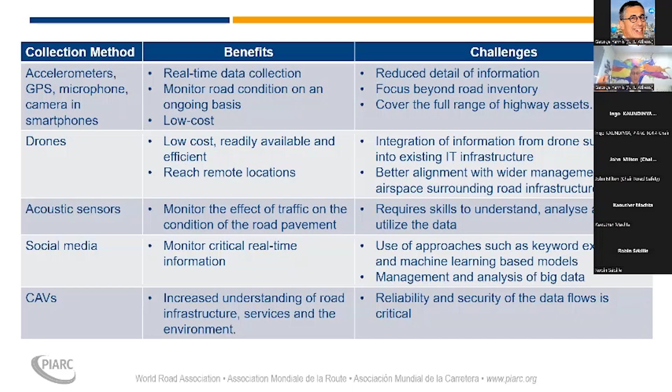It is important to collect accurate data. The main steps to improving data quality include reviewing variable definitions, ensuring definitions are simple to understand and apply.

Reinforcing the need to report data, for example making it a legal requirement, improving data collection tools, collecting accurate location information, improving training of police and data entry staff to register better information about crashes, and ensuring data collected is accurate and reliable through quality assurance measures.

We can give some recommendations for crash data in low and middle income countries. Crash data is important for infrastructure management in these countries.

The collection and analysis of crash data among road safety audits or road safety inspections is a widely applied approach to manage infrastructure and assess the risks.

For low and middle income countries, crash data may not be reliable or available. Surveys and other data sources to measure and monitor road safety are needed.

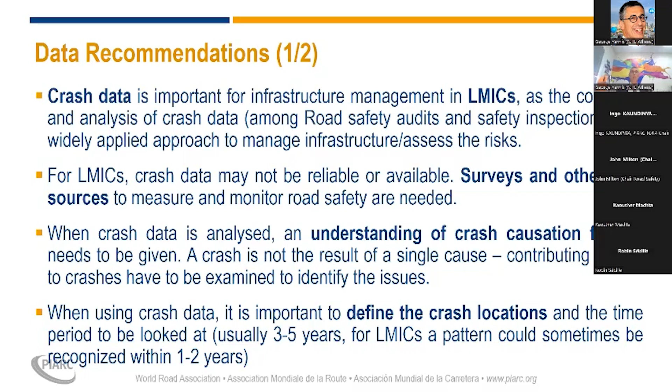When using crash data, it is important to define the crash location and the time period to be looked at. Usually we use 3 to 5 years, but for low and middle income countries, a pattern could sometimes be recognized within 1 or 2 years.

Data is a key factor to evaluate investments. This is especially important with limited budgets, as the effectiveness of road safety measures should be demonstrated.

Inefficient use of limited funding or an increase of crash risk should be known.

We have to keep in mind that data quality is important. For example, a falsely low number of casualties will reduce the importance of road safety as a public health issue.

Misleading information can lead to ineffective decisions being made, for example investing money elsewhere in a road network.

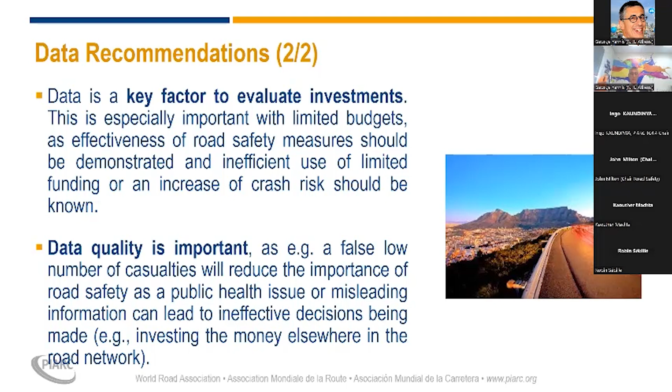PIARC is boosting road safety in low income countries. It recognizes the importance of data, is engaged in promoting road safety all over the world, and is committed to actively supporting safety in low and middle income countries.

All these actions contribute fully to the success of the UN Decade of Action for Road Safety.

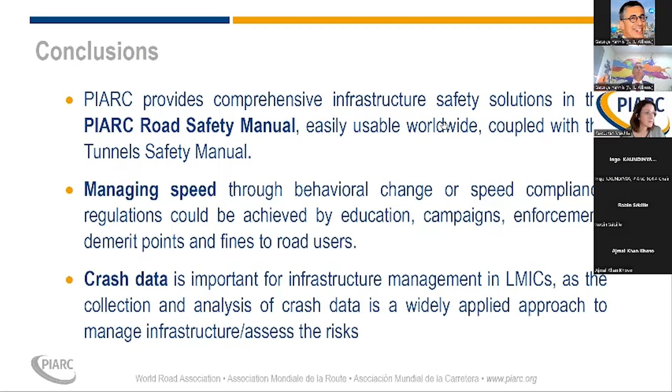So PIARC is engaged in promoting road safety all over the world and committed to actively support safety in low and middle income countries. This new knowledge sharing campaign for road safety provides monthly updates on social media and on the PIARC website.

For all essential road safety areas for the whole of 2023, we have the next webinar on September 15th covering road safety management, VRUs, human factors, and vehicle safety.